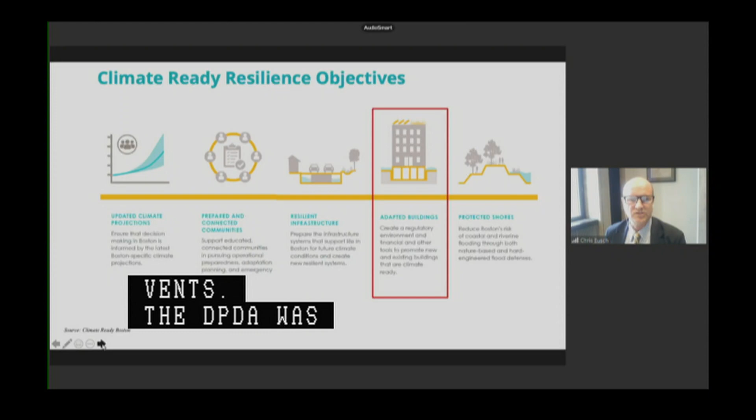To address this risk, Climate Ready directed the BPDA to develop design guidelines as well as a zoning overlay district to promote coastal flood resilience for development projects in vulnerable areas of the city.

In 2019, the BPDA developed a coastal flood resilience design guideline document for new construction and building retrofits, as well as recommendations for a flood resilience zoning overlay district. The design guidelines assist property owners in understanding their vulnerability to current and future flood events and provide a best practices toolkit for flood resistant design measures for a number of building types.

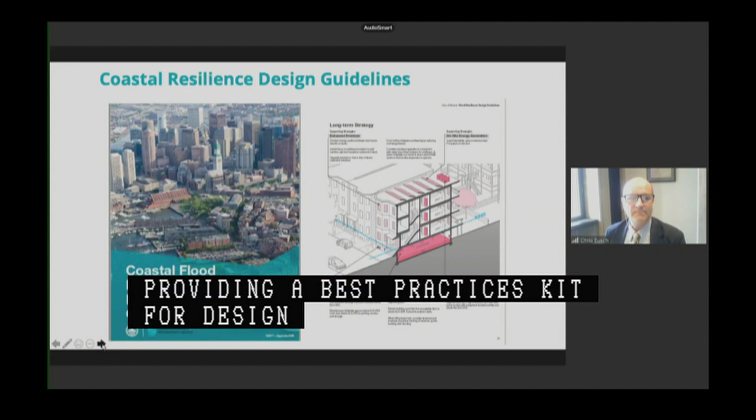After the adoption of the design guidelines by the BPDA board in September of 2019, BPDA staff have been working with a legal consultant to develop the zoning recommendations into the coastal flood resilience zoning overlay. I'll cover some of the primary provisions of the article at this time.

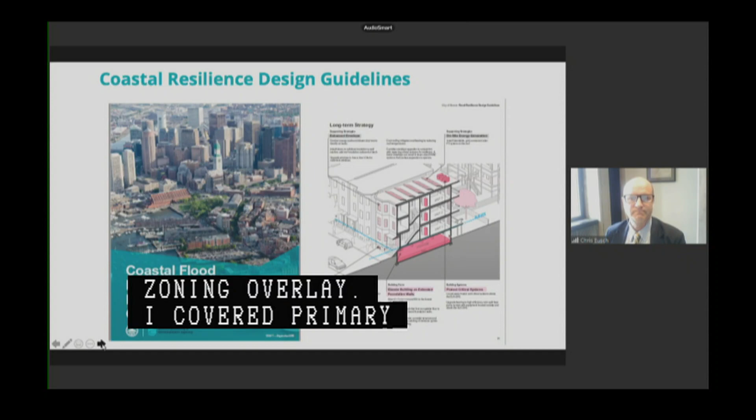First are the purpose and objectives. These are also referenced within the guidelines. Those are promoting resilient planning and design and providing consistent standards for the review of projects.

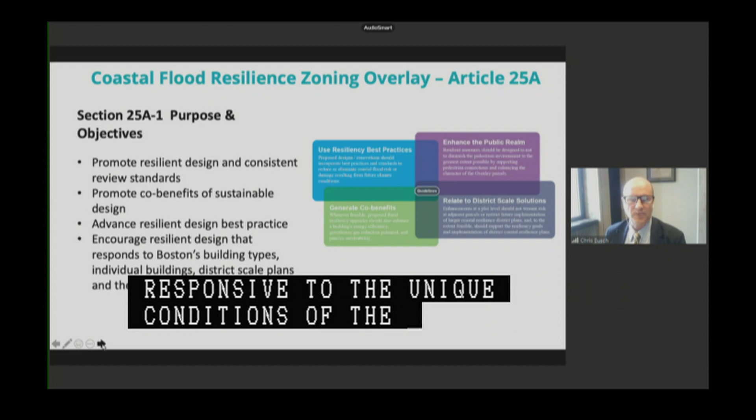Promoting co-benefits of sustainable design that address multiple climate impacts such as urban heat island as well as increased precipitation. Advancing adaptation strategies that are future looking and draw on the best current practice for long-term resilience, and encouraging design that's responsive to the unique conditions of the Boston building typology, also responding to district scale plans that look to protect broader reaches of vulnerable neighborhoods and also enhance the public realm.

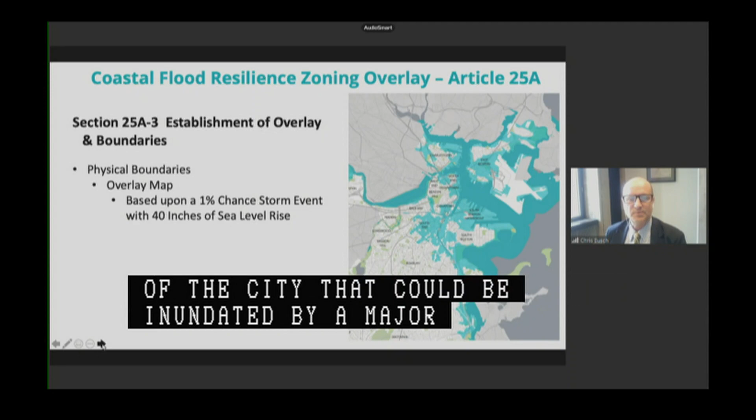So the overlay will apply to areas of the city that could be inundated during a major storm event known as a 1% chance flood with 40 inches of sea level rise. Based upon climate modeling, we expect that 40 inches of sea level rise around 2070, which is within the usable lifespan of most buildings that are currently undergoing BPDA review. That 40-inch inundation area is also already integrated into our BPDA zoning viewer, representing these flood extents and flood elevations.

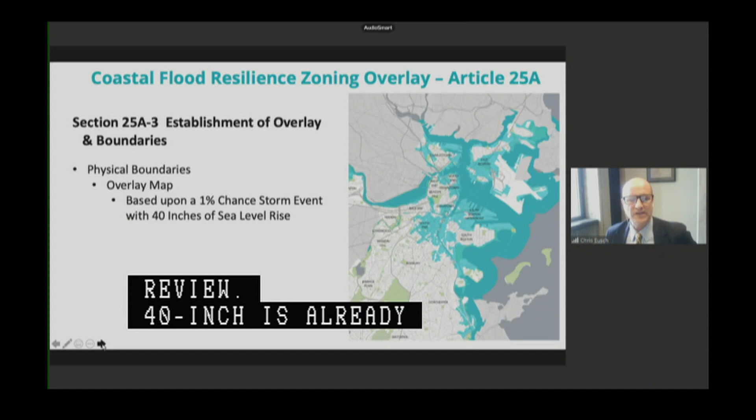This overlay also represents areas of flooding beyond the existing FEMA flood maps. Those FEMA flood maps are based upon historic storm conditions, not future conditions like the overlay.

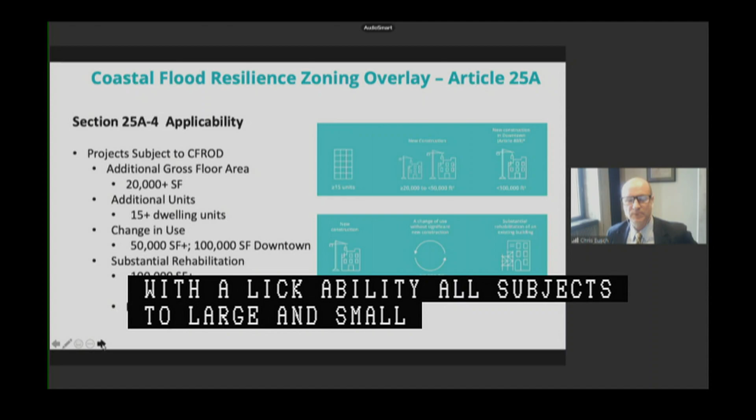With regard to applicability, all projects subject to large and small project review under Article 80 will undergo resilience review as a new component of review. Project proponents will have to address how their projects respond to the Coastal Flood Resilience Design Guidelines. And this process will be overseen and administered by BPDA staff.

We've hired a new senior architect for this very purpose.

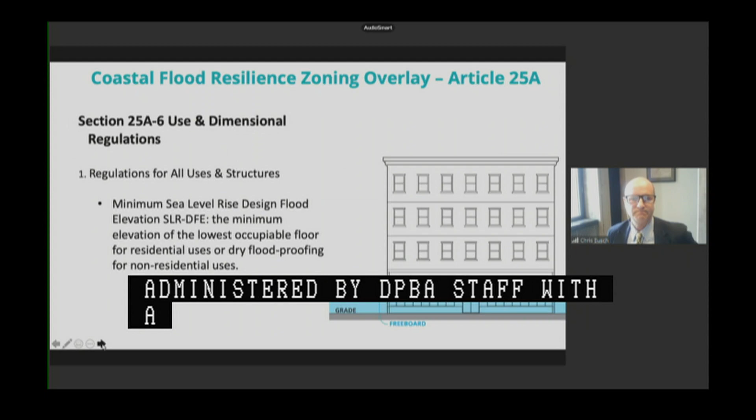There are also, within the overlay, dimensional and use standards to facilitate the application of these design guidelines.

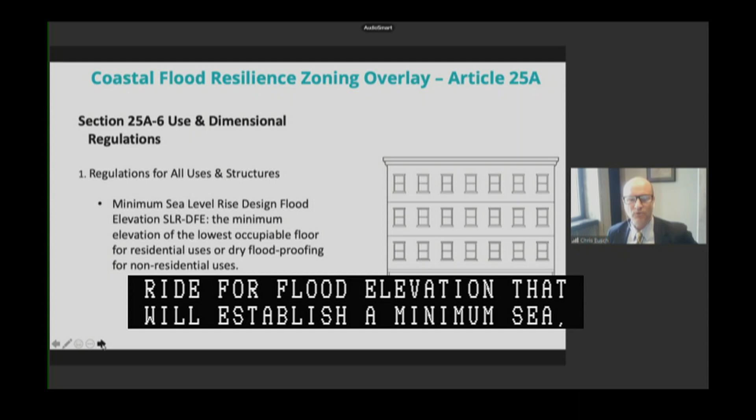Just to get into some of the specific provisions, there'll be a sea level rise design flood elevation, which will establish a minimum elevation for the lowest floor for residential uses and floodproofing elevation for non-residential uses.

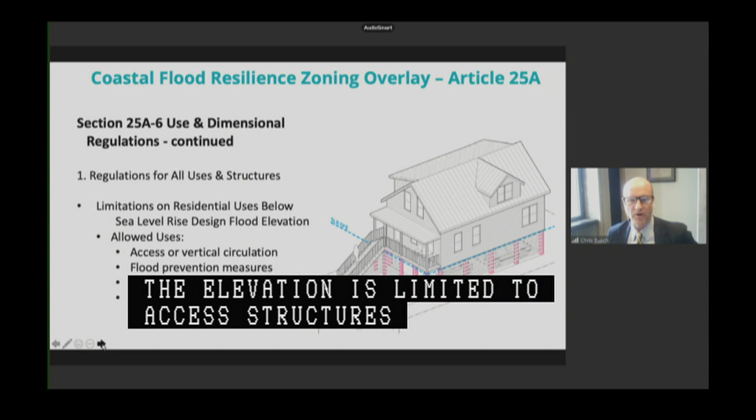There are also limitations on use below that flood elevation. For health safety purposes, uses beneath the elevation are limited to access structures such as stairs, flood prevention measures, storage, and parking, and these provisions are consistent with FEMA flood prevention standards.

To promote the elevation of occupiable space, projects undergoing resilience review will have their height measured from 2 feet above the flood elevation rather than at grade, which is what current zoning requires.

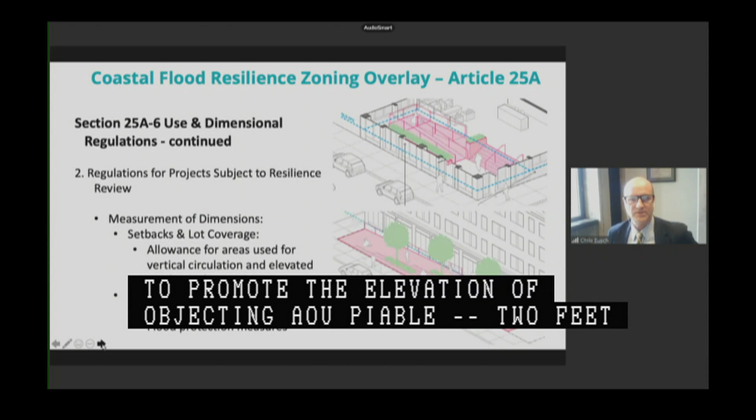And projects will have allowances to extend into side yards, rear yards, front yard setbacks for structures needed for vertical circulation, such as stairs and ramps that may be necessary to get from a lower surrounding grade to a higher first floor elevation. There are also allowances for side and rear yard encroachments for new structures to house mechanical systems to ensure those systems and utilities are not located in basements or below that flood elevation.

And also to maintain usable gross floor area, there will be exclusions for structures needed for vertical circulation and areas devoted to flood protection measures.

There will also be updates to Article 80 to integrate resilience review into large and small projects. Updates as well to Article 31A, the special purpose overlay district provisions of our zoning code, to establish resilience overlay districts.

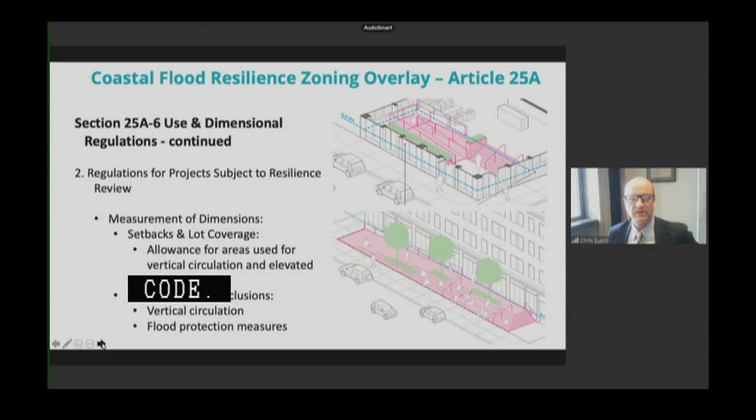With respect to public process, this really began back with the development of the design guidelines and the zoning recommendations in 2019. As part of that process, we held focus groups with practitioners in the legal, design, and development communities. We also held open houses in each of the affected waterfront neighborhoods for residents and stakeholders.

With respect to the development of the draft Article 25A language, we had that posted for public question and comment from mid-December 2020 until February 12th, 2021. We also held two virtual public meetings, which were very well attended with over 160 attendees. We received about 12 comment letters and emails, and based upon that feedback, we posted an updated version of the draft on August 24th of this year.

So with that, the recommendation is to have the director be authorized to petition the Zoning Commission to adopt the coastal flood zoning overlay and related updates. Happy to respond to any questions you may have.

Okay, thank you. Questions or comments from the board? Clearly, this is work that needs to be done. The question is inevitably going to arise as to whether we have guidelines as to what any of this might cost individual building owners or people who may be impacted by these changes. Do we have, or are we in the process of developing any guidelines of that type?

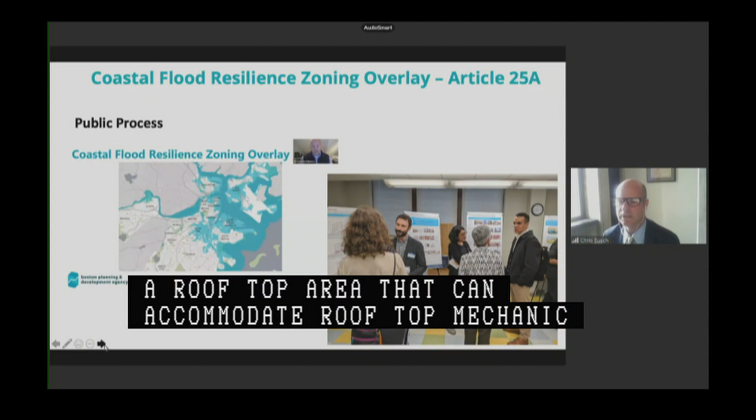Yeah, that's typically for cooling towers, et cetera, but all your electrical — transformers and switch gear — typically isn't on the roof. I've seen it anywhere from the 13th floor to other places. I'm just curious, if it's going to take up a whole floor that would be rented, is that additional space going to be allowed, or is it being discussed?

Yeah, I think that's something we would need to discuss — how height might be evaluated if mechanicals were significant enough to take up a whole floor and there was no other alternative for locating those systems, as part of a larger footprint, let's say, as opposed to going up.

I know after Sandy, New York City allowed an additional two stories — if you relocated your mechanicals that were in the basement, you could put two more stories on top of the building if you wanted to. Thank you.

Great. Any additional questions or comments? All really great feedback.

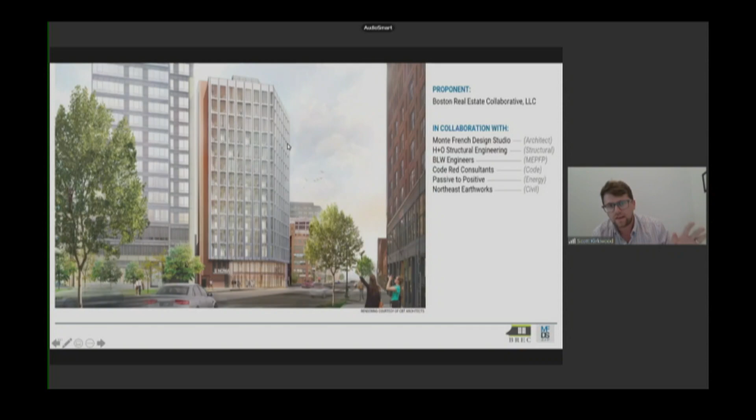For us, it's really about sustainability at the forefront. We're actually doing a cross-laminated timber project near our offices in Roxbury right now. In a building like a hotel, or any new construction for that matter in a really dense area like the West End, the heat island effect created by people—especially in a hotel scenario where they're running their air or heat as much as they want—is something we're really looking at ways to combat. So we're pursuing passive building practices to ensure that in an environment where people are using this stuff as much as possible, we're limiting the impact to the surrounding neighborhood as much as humanly possible.

More on that, steel is, for lack of a better phrase, kind of a thermal superhighway. So when you're trying to build a building that's as efficient as possible, steel creates thermal bridging that actually allows the outside air to penetrate the exterior walls of the building and into the core, and it ends up requiring a substantial amount of increased energy to meet the needs of the folks living in the building.

And for us, cross-laminated timber in itself is just a great way to take carbon that continues to get recirculated in the atmosphere and actually take that out of circulation. The trees that go into the cross-laminated timber used in the superstructure are actually at the end of their useful life in terms of their ability to absorb carbon from the atmosphere. So we're taking that out of circulation, which in turn equates to taking a substantial amount of automobiles off the road for a substantial period of time.

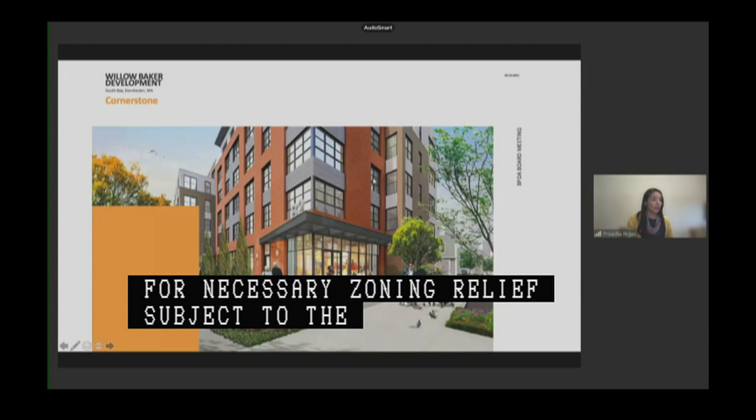We are pleased to provide an overview of the proposed Willow Baker development project located in Dorchester. As stated, the project is a mixed-use development located on a 1.3-acre site consisting of 3 new buildings with a total of approximately 177,300 square feet and 191 residential units. The residential units include 99 homeownership condo units and 92 rental units, and there are a total of 57 parking spaces on site as well as new open space.

I will offer a few remarks about the regulatory review and then turn the presentation over to the development team to review the project program, and then we'll assist with any questions you might have. Willow Baker LLC submitted a project notification form on August 7th, 2020. An IAG meeting was then held on October 6th, followed by a public meeting on October 22nd.

A request for supplemental information was then issued on April 12th, 2021, and a supplemental filing was then submitted on June 2nd. An IAG meeting was held in relation to that filing on June 23rd, followed by a public meeting on June 30th, with the comment period closing on July 6th of 2021. The project has gone through Boston Civic Design Commission review and was approved by the BCDC on September 7th, 2021. And I will now turn it over to Joe Hanley, the attorney for the development team, to advance the presentation.

Thank you, Sarah. Good evening, Madam Chair, members of the board, Secretary Polhemus, Director Golden. Attorney Joe Hanley, McDermott, Quilty, Miller. I am here representing Cornerstone Real Estate, Adam Sarba, who's the proponent. Also with us is Nidhi John from Prellwitz Chilinski Associates, who will take you through the presentation.

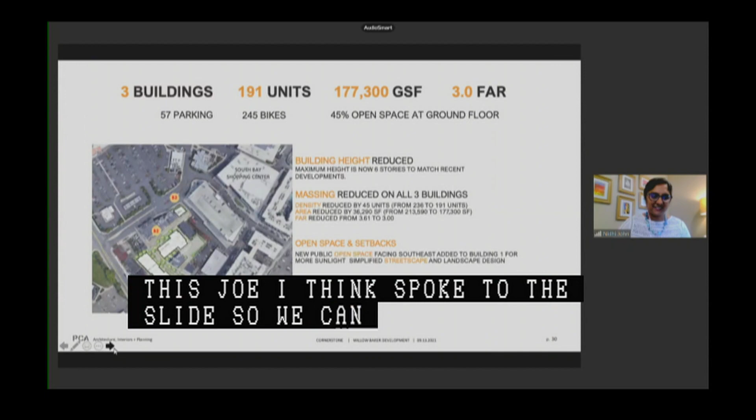This is an overview of the last few months of the process with the BPDA, as well as the BCDC Commission. As a result, the following slides will show you what it looks like, but it's 3 different buildings. As you can see, buildings are B1, B2, and B3. This is in the South Bay Shopping Center area, which was recently developed by the Edens property buildings. The 4 highlights for this project were, 1, the building heights were reduced to match with the recent developments in the area. Massing reduced from all 3 buildings.

The team was able to add more open space, 2 open spaces, actually 2 parklets, 1 in front of building 2 and 1 in front of building 1. And lastly, we had a big programmatic change, which basically converted the building that says B1. It's a fully condominium building with 99 units of home ownership. Next, please.

These are just a few existing photos of what the site looks like today. The 3 red markings are the actual 3 parcels, basically 13 original parcels that were assembled. And as you can see from the photos, you can tell the overhead telephone poles. There's about 11 telephone poles that we are making underground for this whole project. The highlight for this project is basically the public realm.

The sidewalks today are between 3 feet and 2 feet, and we are making them 10-foot sidewalks. Adding landscaping, we are giving a good chunk of our property off to make the roads wider and to allow for the sidewalks to be wider, because our sites are in a good position to be able to help the larger community. Next, please.

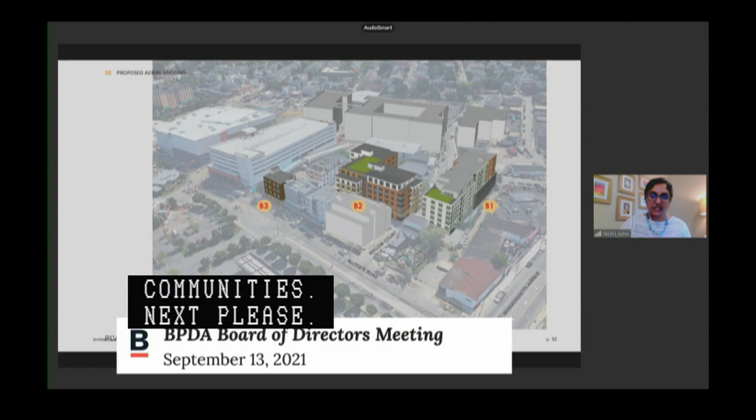This is an overall massing model to just give a sense of what the buildings are and how they're spatially placed against everything. Next. And as you can tell, buildings B1 and B2 are the 6-story buildings, and building 3, which is a little one, is the 4 stories, which kind of ends the street.

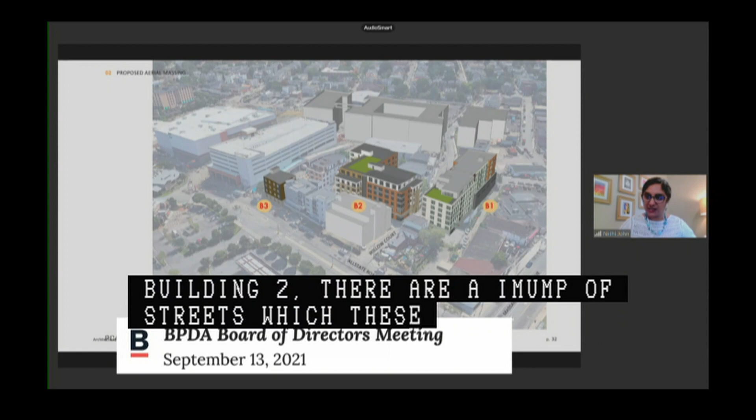So there's a bunch of streets that these buildings affect, about 4 or 5 streets. Willow Court and Baker Court, which you can't see because it's between the words building 2 and the actual building. But we can run through the plans, we'll show you. So on the left that you see is building B1, which is a condominium building. The one in the middle, B2, is rental. And the last building on the right, which is B3, is also rental. So that adds up to the 191 units.

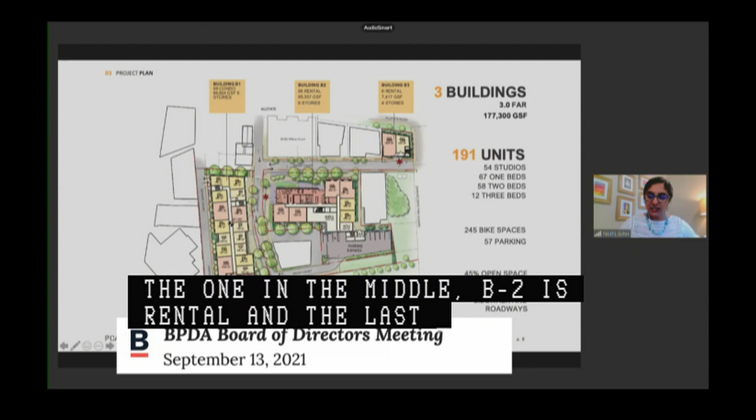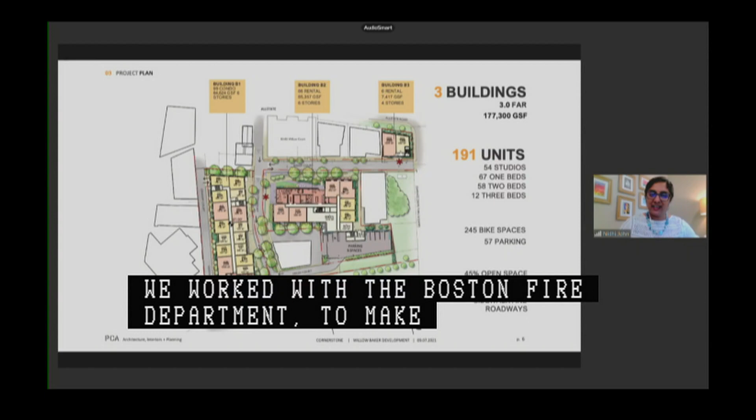You'll see we focused on making sure we had enough 2 bedrooms and 3 bedrooms, along with studios and 1 beds for this area. We worked with the accessibility department at the BPDA, as well as the BPDA folks internally, to understand the limitations and to make sure that we had good clearance with streets. We worked with the Boston Fire Department to make sure that we addressed everybody's concerns in terms of accessibility onto the site. Today, where you see the words building B3, the street ends there and there's no neighborhood connectivity to the larger neighborhood.

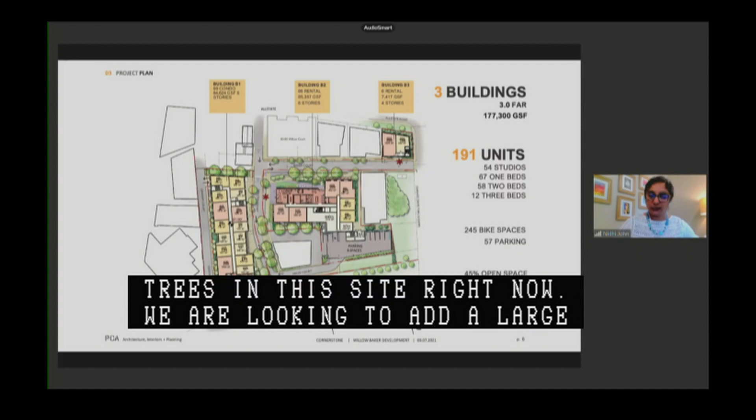So the goal of this project is to add trees, and you would have noticed from the pictures, there are no trees in this site right now. We are looking to add a lot of streetscape, landscape, and better public realm across the board on 3 streets. Next, please.

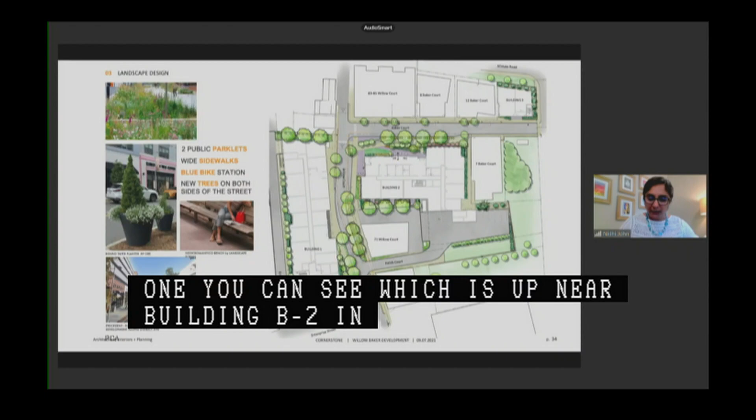This is a landscaping plan that just gives a sense of, when I talked about public space and open space, we looked at adding 2 public parklets. One you can see near building B2, in that area which says Baker Court at the top. And then at the bottom where you see Enterprise Street, which is building 1. So we looked at creating more public spaces for the neighborhood where people can come and hang out and sit.

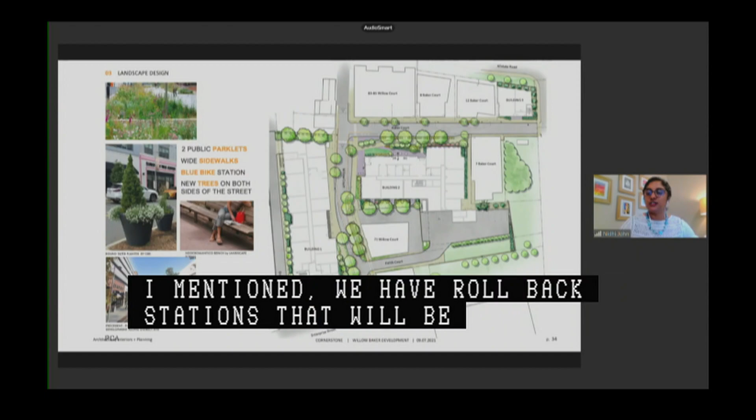We have widened the sidewalks, as I mentioned. We have a 15-dock Blue Bike station that will be beneficial for the neighborhood. And as I mentioned, new trees on both sides of the streets, all along Willow Court, the vertical one, as well as Baker Court, the horizontal one. Next, please.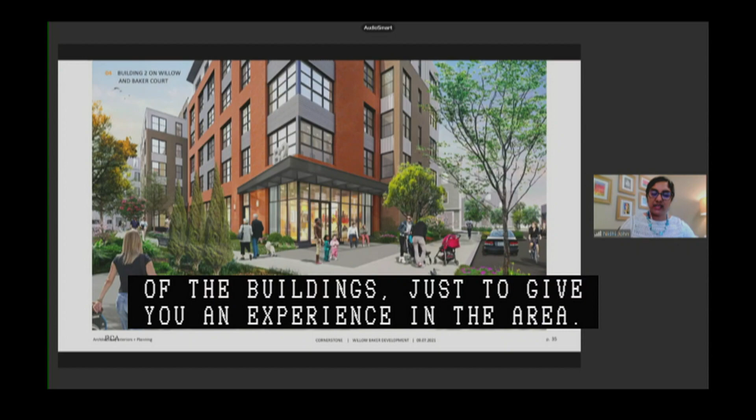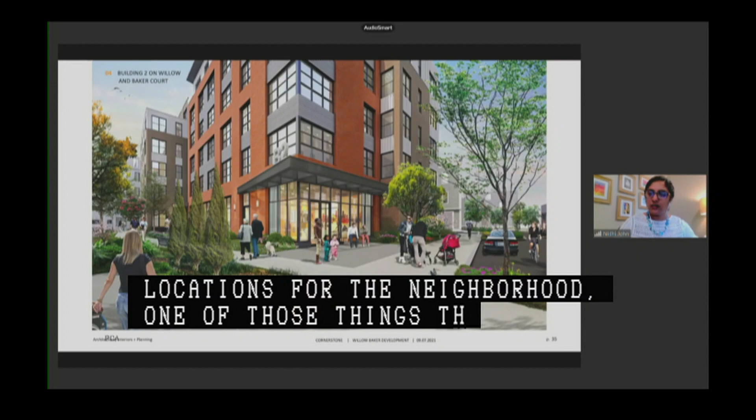And we have a drop-off and pickup area in this neighborhood. We met with the neighborhood many times in the last few years, and we talked about what the neighborhood needed as an amenity, and drop-off pickup locations for the neighborhood were one of those things that we maintained on the site. So that's why you kind of see the car next to the stroller. That's a place for the drop-off pickup. But this is building 2. The next slide, you'll get a sense for the other 2 buildings as well.

This is building 3, which is the tail end. It's the last parcel along Baker Court. It abuts a driveway, which is near the Edens parking garage. So you kind of see the parking garage in the distance, but the goal was to match the existing context in the neighborhood. So this is 4-story buildings on that side, so we made sure we matched it, and we're talking about how to liven up the street.

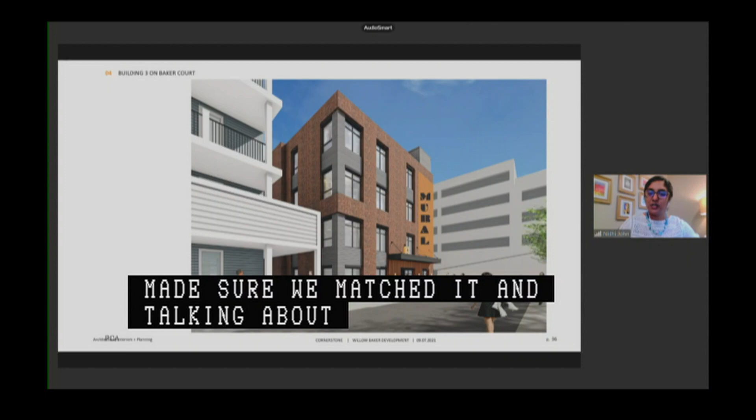The words mural are to indicate that we would have some kind of a mural, as that is the street that turns to the South Bay Shopping Center. So you want to make sure that activated the pedestrian life. Next, please.

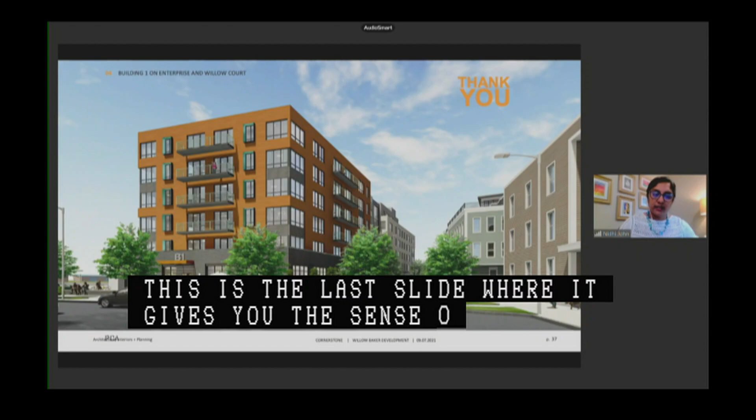This is the last slide, where it gives you a sense of the condominium building, which is building 1. To our left is Mass Ave. The street that you see in front of us is Enterprise Street. And like I was talking about the public realm space, we basically gave a good chunk of the property for building 1 on the left. So you can see the road looks really wide. It was intentionally that way so that we could add landscaping for the neighbors on the opposite end too.

So the road felt more balanced for the greater good of the neighborhood. That basically ends the presentation that we had. And the last slide was again the highlights of the project. Sorry if I breezed through quickly. I'm happy to go back to any questions.

Thank you. Thank you, Nidhi. Thank you, Madam Chair. That concludes our presentation. Yeah, thank you, everyone. Great job, Nidhi. It was a perfect amount of time, enough detail and enough broad strokes.

So, I just really like the addition of the green space, given that we definitely take a climate justice lens to the work that we're doing. It's something that is, again, top of mind when we're building in these already dense neighborhoods that don't have a lot of green space. So just lovely to see. Questions or comments from the board?

Just a comment, could you go back to your second slide, the aerial view of the overall neighborhood? And in some respects, this echoes the chair's comments. Page 5, Dr. Landsmark, I think. Yeah, there's one that's even a broader view than this. Yeah, that one.

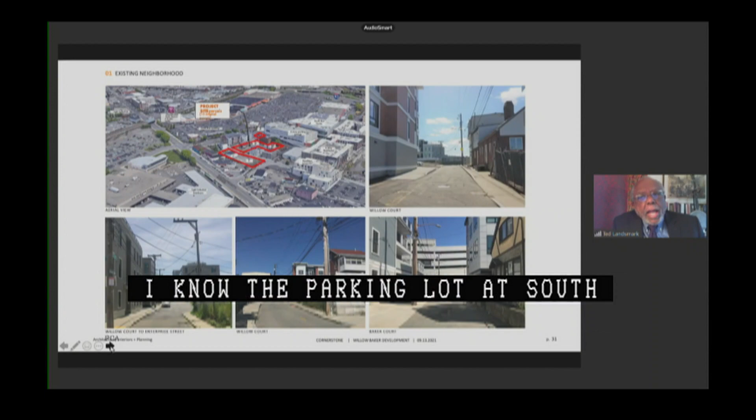This area for a long time has been really an environmental disaster in terms of environmental justice. As far as I know, the parking lot at South Bay does not have permeable paving. The area is surrounded by heavy traffic. The Amtrak line runs through it by the T there. And this is an area where there's going to be a lot more residential housing going in over the next

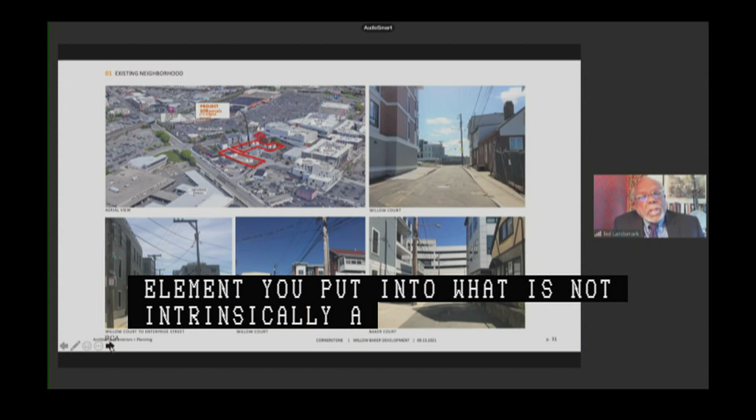few years. And my comment is to commend and thank the proponent and the design team here for taking a step towards making this area much more environmentally friendly. The plantings, the sidewalk widths, the overall design element that you've put into what is not intrinsically a very large area as such, I hope becomes much more of a precedent for other developers, particularly residential

developers in this area. And I want to thank the staff and all of the folks who are taking a step towards improving the environmental quality of this area. We've got a couple of areas like this in the city, but this one is, I think, particularly egregious, particularly because it brings so much pollution into a neighborhood, which is not that far from the waterfront, and certainly not that far from downtown, and is surrounded by communities that don't have a lot of wealth.

And I view this as an asset. So I'm hoping that there's a message that's sent by this development to other folks who intend to develop residential properties in this area, that we really want to see a level of environmental justice implemented here. Thank you, Dr. Landsmark and Madam Chair. That was beautifully said.

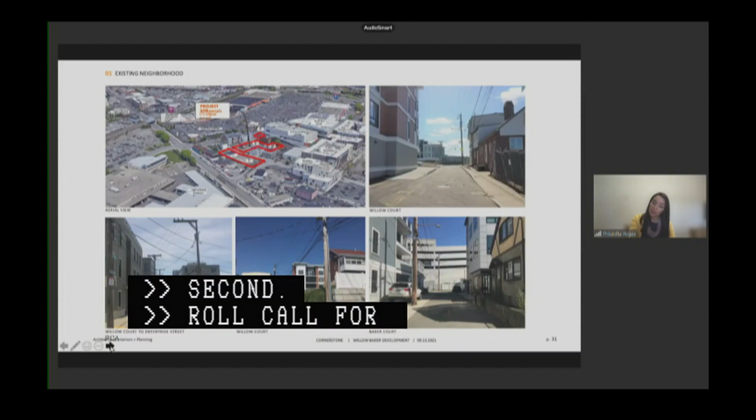All right, any additional questions or comments? Okay, hearing and seeing none, a motion is in order. So moved. Second. Roll call for a vote. Ms. Downs? Aye. Mr. Monahan? Aye. Landsmark? Aye. Mr. Miller? Aye. And the chair votes aye, motion passes. Congratulations, good luck. Thank you very much. Thank you. All right, take care.

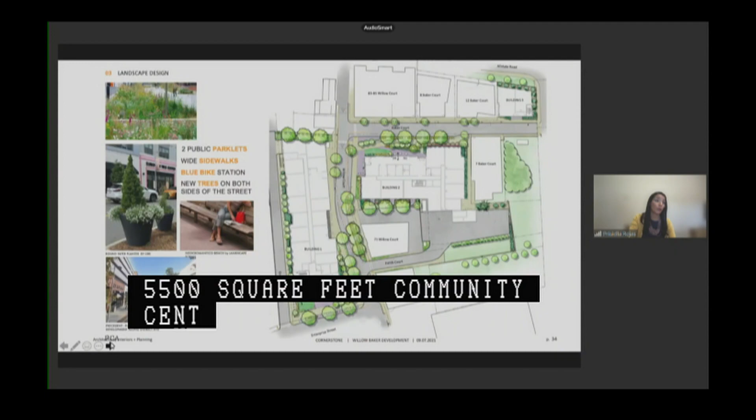Item number 18, request authorization to issue a scoping determination, waiving the requirement of further review pursuant to Article 80, Section 80B-5.3(d) of the zoning code for the Cheney Street Apartments project consisting of 59 affordable senior rental units, 15 affordable homeownership units, 5,500 square foot community center, and 34 parking spaces located at 4 through 18 Cheney Street, and to take all related actions. Lance.

Thank you, Madam Chair, members of the board, Director Golden, Madam Secretary. I just want to note for the board that this project is seeking funding from the Department of Neighborhood Development and also from DHCD. And the project was filed by the Jamaica Plain Neighborhood Development Corporation. The project is located at 4-18 Cheney Street, 24 Cheney Street, and 3-5 Schuyler Street in Roxbury, outside of Grove Hall.

The project consists of 75,000 gross square feet of development, including 74 units. 59 are designated senior rentals and 15 home ownership units, 9 of which will be located at 24 Cheney Street, all 3-bedroom flats. 6 more will be located at 3-5 Schuyler, all 2-bedroom flats. The senior building unit mix consists of 57 1-bedroom units and 2 2-bedroom units.

A Program of All-Inclusive Care for the Elderly (PACE) center measuring 5,500 square feet, including a total of 34 new parking spaces, 28 of which will be located at grade below the senior building, while 6 spaces will be located at 3-5 Schuyler. For the senior rental building, the IDP percentages will range from 30%, 50%, and 60% of AMI. Jonathan Garland, the project architect, will give a brief overview of the proposed project, and the project representatives are available to answer any questions from the board. Jonathan, I think you're muted.

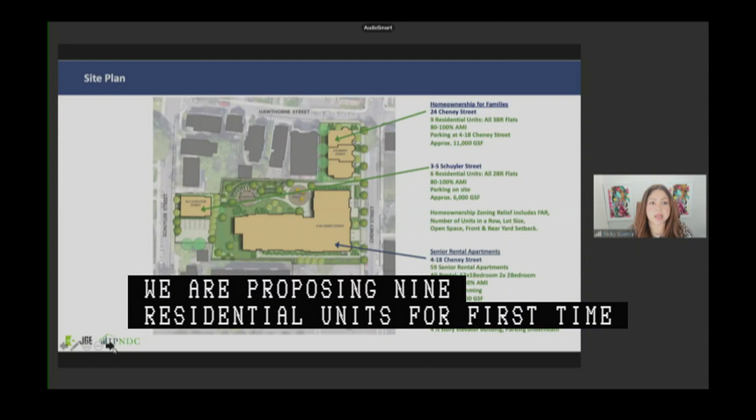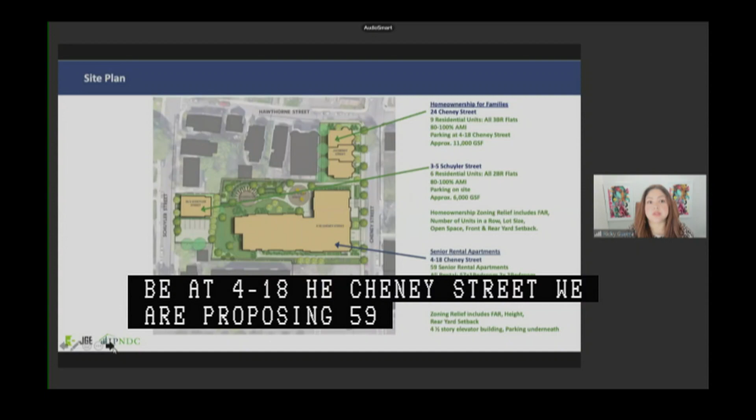At 24 Cheney Street, we are proposing 9 residential units for first-time homeownership for families at 80 to 100% AMI. At 3-5 Schuyler Street, we are proposing 6 residential units, all 2-bedroom flats, for families at 80 to 100% AMI. And at 4 to 18 Cheney Street, we are proposing 59 senior rental apartments, all at or below 60% AMI, with 31% of those serving family or seniors at or below 30% AMI.

Thank you, Ricky. This slide shows a closer zoom-in of the 59-unit senior building. Looking at the image on the right, you can see the lobby space as well as the units, shown in orange, and the PACE center, shown in pink.

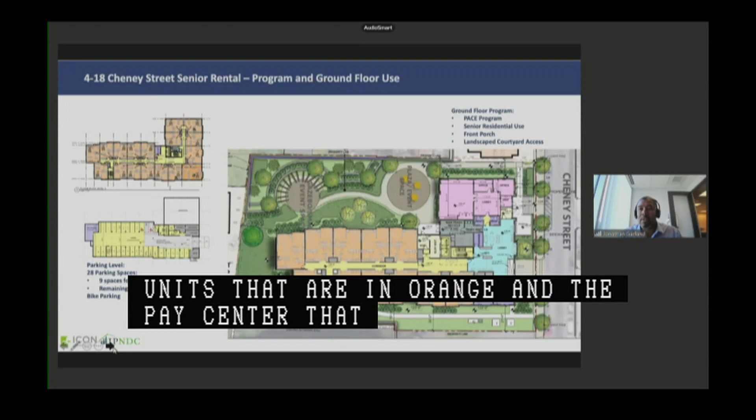We really wanted to take care with Cheney Street, which is currently a one-way street going down the page and will remain a one-way street. We wanted to enhance the public realm by widening sidewalks, creating new street tree plantings, and pushing the building further back away from the street to allow for ample circulation, setback space, and entry/exit from the parking, which is below grade because the site slopes up at an angle.

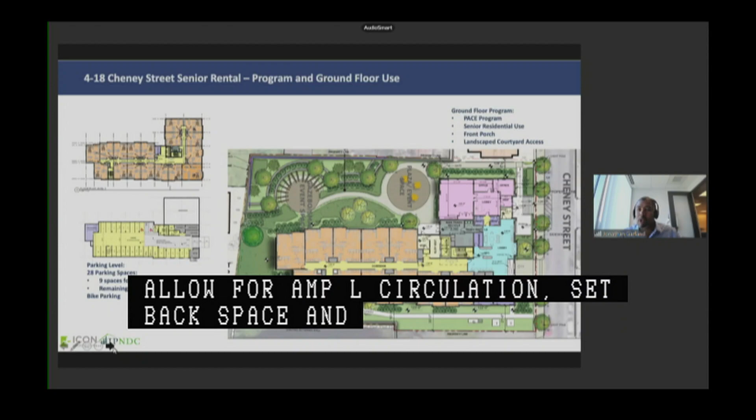We've also been able to incorporate a plaza event space, really an ample backyard for the senior community, which will have great southern sunlight and the ability for privacy and security for the seniors.

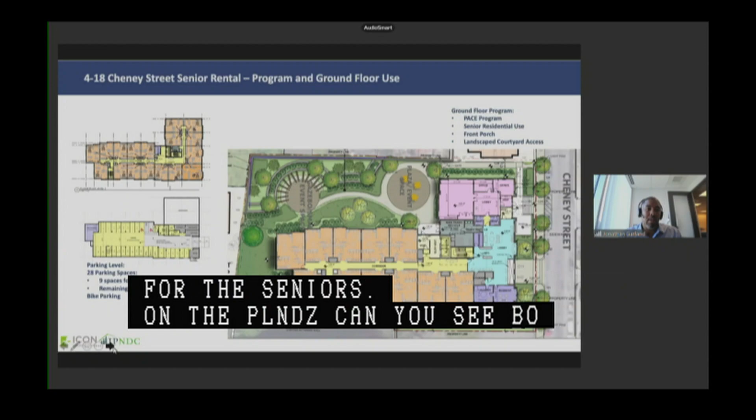On the left you can see both the parking plan, in yellow, and the residential plan above. I'll note that the home ownership units all have one-to-one parking. The 9-unit Cheney Street building uses the senior building for parking, and the Schuyler Street building has parking on its own site.

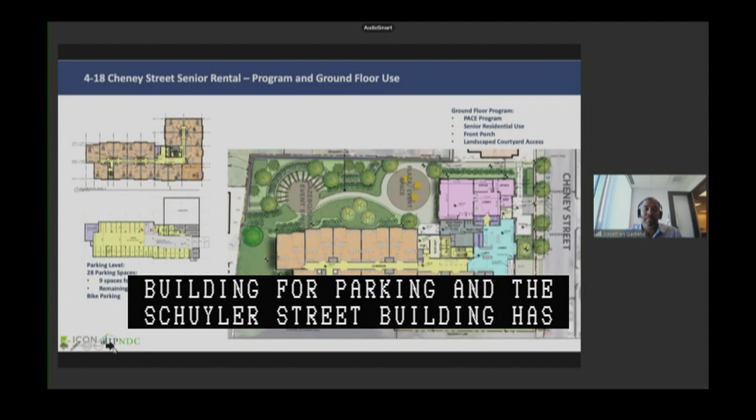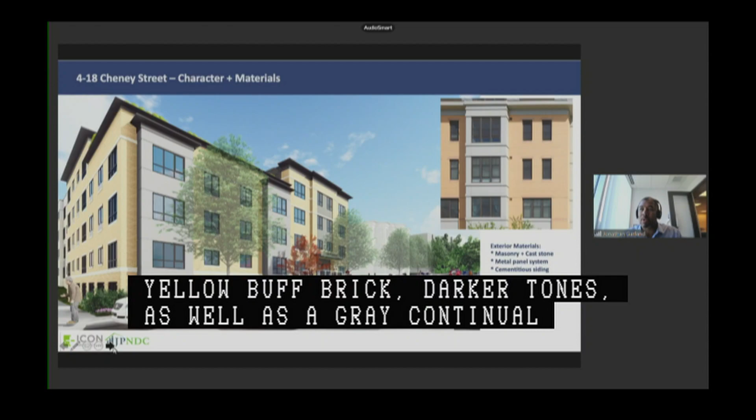This shows a perspective rendering from Cheney Street looking at the 59-unit senior building. A lot of the precedent we took from the area was the use of the yellow buff brick, darker metal tones around the cornice lines, and a gray contrasting metal where you see the bay windows. That, combined with the trees and larger sidewalk space, we think creates a nice contribution to this currently underutilized site.

This shows another angle of that same front view, looking down toward Blue Hill Avenue. We're really working to negotiate the grading change, as the site slopes up from Blue Hill Ave toward Hartwell Street, which is at the top end of Cheney Street.

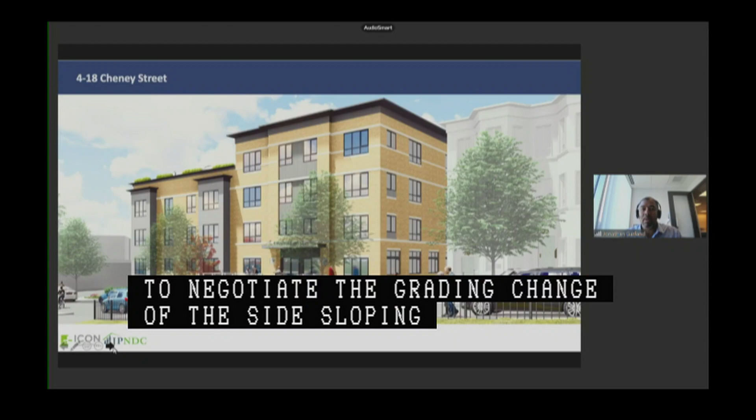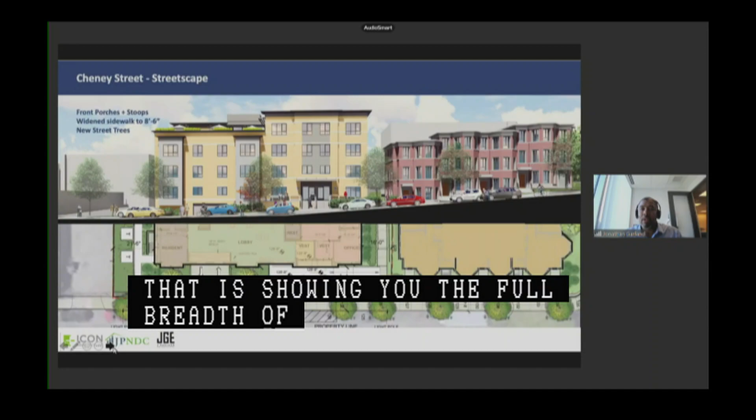This shows the two buildings paired next to each other: 4 to 18 Cheney on the left, and 24 Cheney on the right. This shows the full breadth of this neighborhood intervention, where the senior building is in yellow and the home ownership building for families is a fiber cement building with the look and feel of red brick. That was intentional so it could pick up on the character of the street, with bow fronts and an angular form, and each unit having its own direct entry off of Cheney Street.

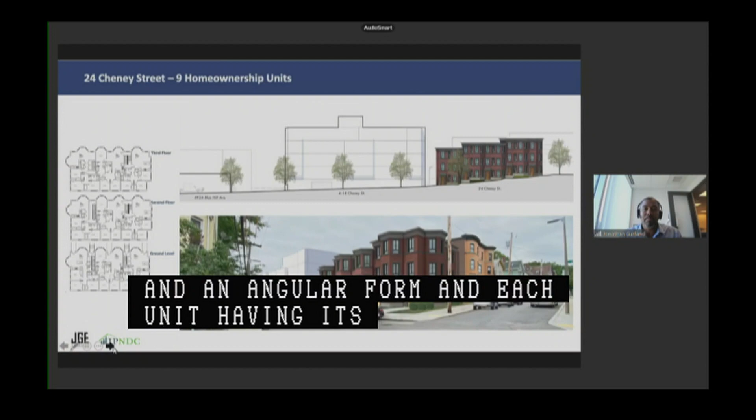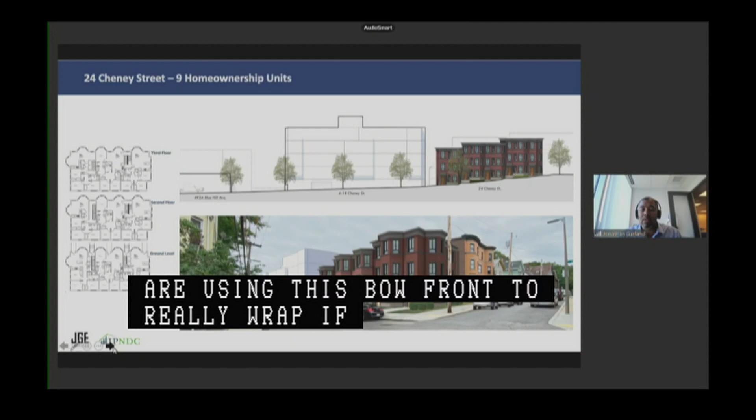So this is showing more of a zoom in of the 9-unit homeownership building. It does wrap the corner of Cheney and Hartwell Street. So we're using this bow front articulation to really wrap the corner. We're continuing the newly widened sidewalk with street trees along that edge. And as Lance mentioned earlier, this building is a collection of 9 3-bedroom flats, 3 units per floor. Next slide.

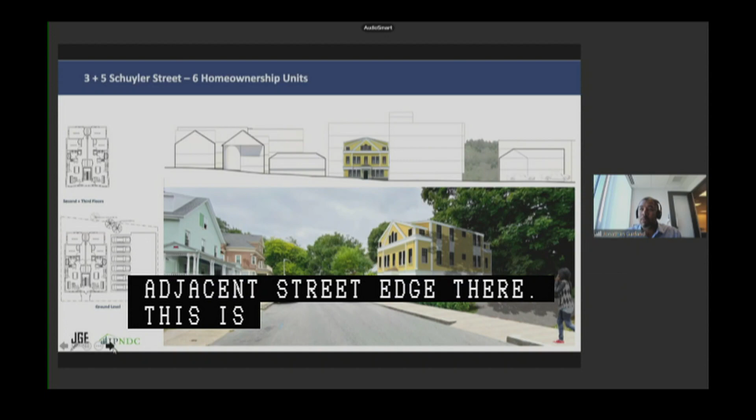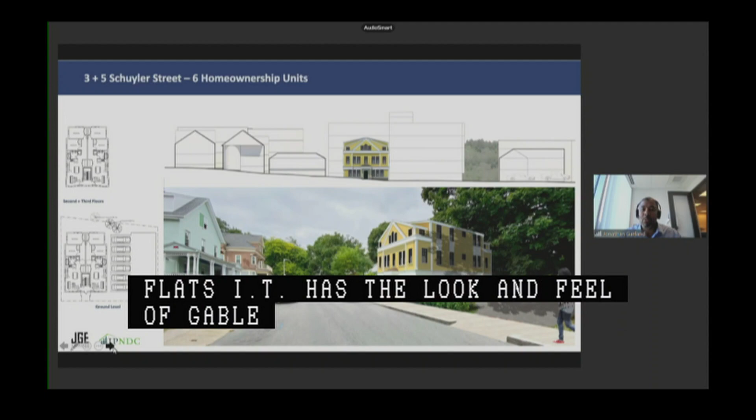And this is skipping over to 3 to 5 Schuyler Street, which is on the opposite adjacent street edge there. And this really is taking cues from a lot of the larger Roxbury single-family homes that you are probably familiar with, the 6 to 8 bedroom homes. That was the genesis, or the look and feel of the building, although it does house 6 independently owned 2-bedroom flats. It has the look and feel with gable ends and a lot of evolution of the design happening on the front facade to animate it and make it look sculpturally interesting, like a lot of the other single-family homes on Schuyler Street.

You can also see how we've tucked in the parking, the 6 spaces there, and have created a decent landscape edge buffer along the street. Next slide.

Awesome. Thank you. Great presentation, Ricky and Jonathan. So, questions or comments from the board?

I have one. First of all, I find the substance of the project that you're putting forward very appropriate for the time and the neighborhoods and the housing needs of the people of Boston at this moment. But I want to add a small comment. If you would go back to any one of the renderings that you put up, one of the early ones.

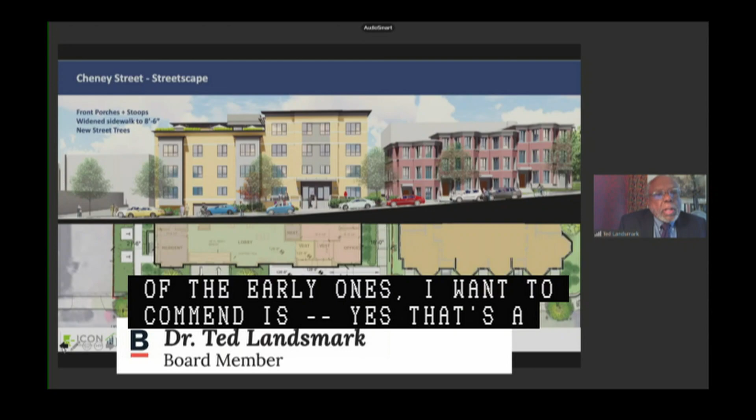I want to commend — yeah, that's a good one. I want to commend the development team for putting into this image people who are clearly seniors, they're clearly diverse, they're using different modes of transportation. Not every car that's rendered is a BMW or Mercedes.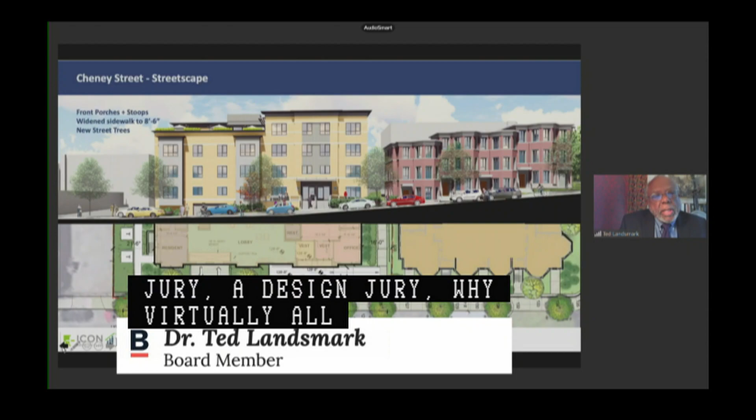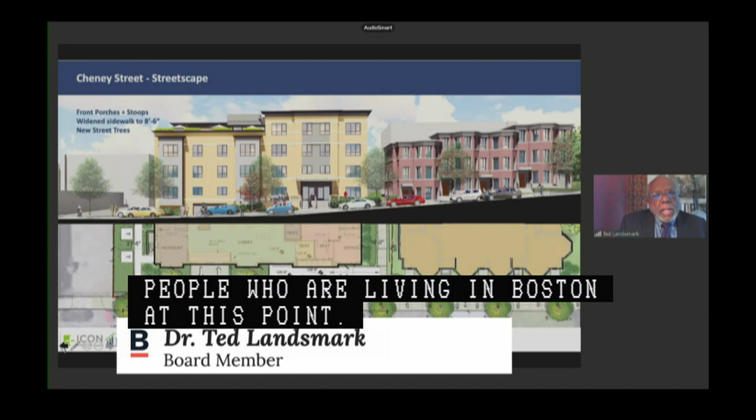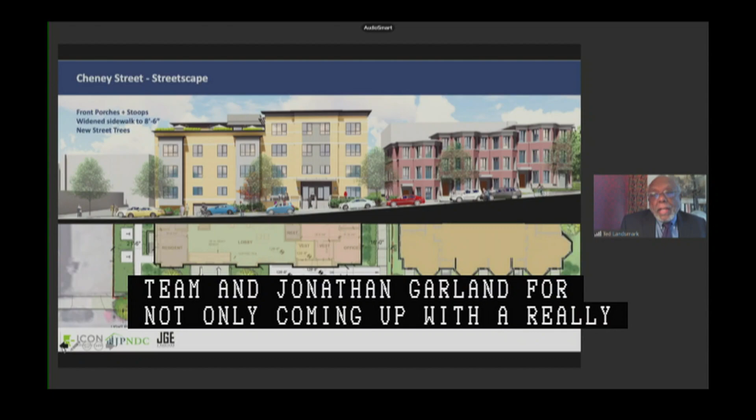I just finished sitting on a jury, a design jury, where virtually all of the renderings showed people in Boston communities who looked like architecture school students, traditionally defined. And I, for one, would like to see more of these presentations like this one that show the real people who are living in Boston at this point, and not some version that came out of a designer's toolbox. So I commend the Jamaica Plain team and Jonathan Garland for not only coming up with a really nice design that clearly fits into the neighborhood.

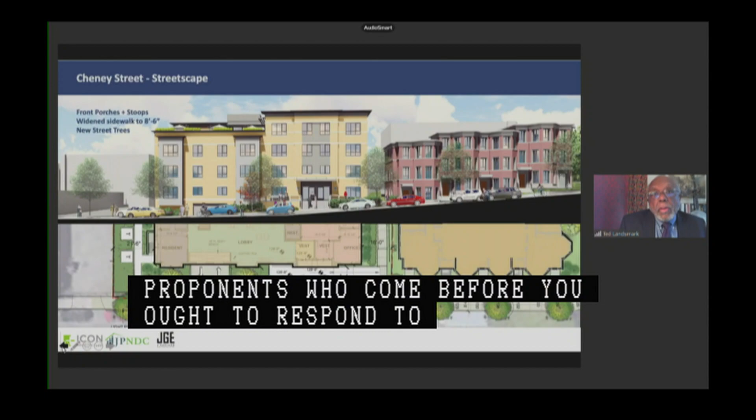But also one that shows what Boston is and has become and will be into the future. And I think many more of the proponents who come before us ought to respond to the obligation of designing for the city that we have become, and not the city we might have been once.

Thank you, Dr. Landsmark, for that comment. And I would just make mention that this project has been a collaborative joint venture between J. Garland Enterprises and Icon Architecture, who have been doing a really nice job on the senior building and are responsible for this image. But thank you for that comment.

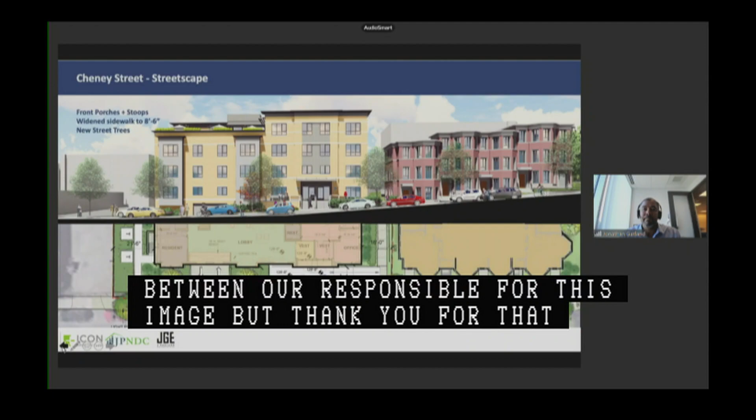Great, yeah, plus one. It's funny, in my notes I was like, it feels and looks like it fits, like it felt like Boston. I couldn't quite figure out what it was, just the design architecture, but maybe picking up on what Dr. Landsmark was saying, of just kind of seeing yourself represented and seeing the variety even in the imagery.

Yeah, good points. And again, great job. And I really do like the design. Sometimes we're picking up on the architecture of the street, right? And I'm like, well, does it? I don't really know. But this one really does feel like I can see and feel those elements in those renderings, and can envision enlivening the neighborhood with the new, while respecting the history and the context, which is, I think, in our mission statement or tagline somewhere. So it's a great presentation.

Additional questions or comments from the board? I'd just like to add, great job. I love the green space, and it truly does seem to fit into the neighborhood. So well done. If you added a couple of double parked cars, it might look more. So, but excellent, good work. Thank you. Thank you. Good stuff.

All right, I think a motion is in order here. So moved. Second. Roll call for a vote. Ms. Downs? Aye. Mr. Monahan? Aye. Dr. Landsmark? Aye. Mr. Miller? Aye. And the chair votes aye. Motion passes. Congratulations and good luck. Thank you. Thank you. Thank you.

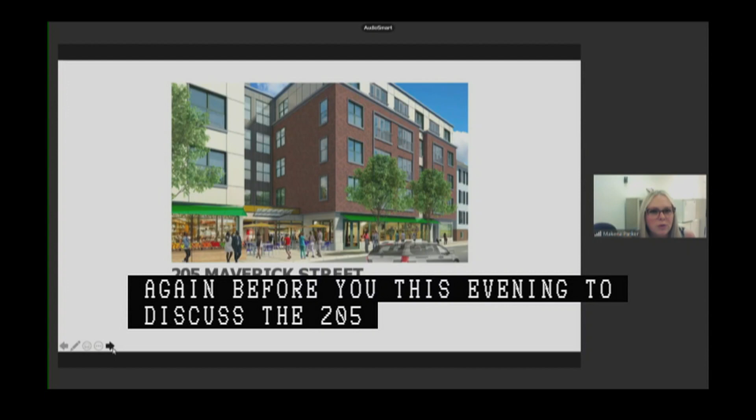We are once again before you this evening to discuss the 205 Maverick Street project. As you may recall, this project was originally approved by the board in November of 2018. At this time, the project included approximately 60,000 square feet, comprised of 49 rental units. Tonight, we ask you to consider this project update, which was filed with the BPDA on June 22nd, 2021. This project update proposes a change in programming from rental units to condominiums. 205 Maverick Street remains at its previously approved size. The parking and retail components also remain unchanged from the 2018 approvals. Outside of the modified IDP obligation, which now includes 7 IDP units, all mitigation and community benefits associated with the project remain the same.

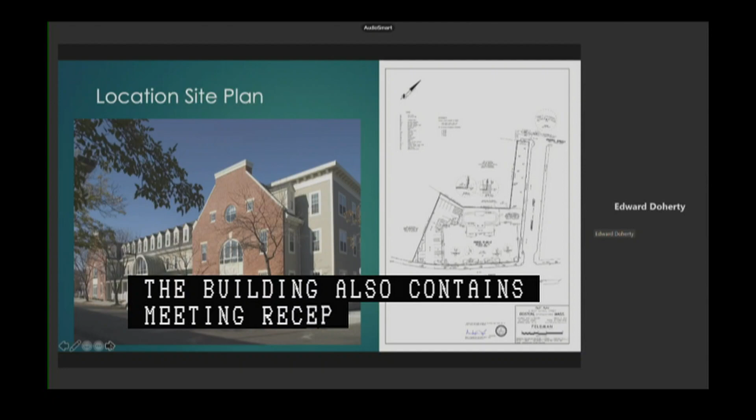The Selma Lacy House is a 3-story brick building containing 66 assisted living dwelling units, of which 33 are income restricted. The building also contains related meeting, reception, recreation, dining, and medical management space, a senior daycare center, outdoor parking spaces, and landscaped open space. Selma Lacy opened in 2004 pursuant to a land disposition agreement between the current owner, Mishawum Assisted Living Associates, LLC, and the BPDA, successor of Boston Redevelopment Authority.

Next slide, please. The location: Selma Lacy House is accessible to Interstate 93 and Route 1, City Square, and is well served by the MBTA's Boston Community College Rapid Transit Station and MBTA Bus Route 92.

Since the current owner opened Selma Lacy House in 2004, the property has only been at full occupancy once in its 17-year history. Moreover, the building has been operating at a $1 million deficit for each of the past 4 years. This amounts to approximately $4 million in losses due to the high vacancy rates and the high expenses of operating the Selma Lacy House.

The developer is proposing a complete interior renovation of the entire building at a cost of approximately $11 million, and to change the building program from the assisted living model to a modern model of 48 100% income restricted dwelling units for seniors, with service to be provided by third-party providers for residents.

With respect to concern about the potential relocation of existing tenants, the applicant has been actively engaged in communications with residents and their families about the proposed transition of services from a fully licensed assisted living facility to a senior independent living model with coordinated third-party services.

We are committed to not displacing anyone. Our intention is to provide third-party coordination through PD Resident Services, PACE, and Boston Senior Home Care. We have partnered with Boston Senior Home Care to help us educate residents and families about the proposed post-renovation service model so they can confidently decide if the service model will work for them.

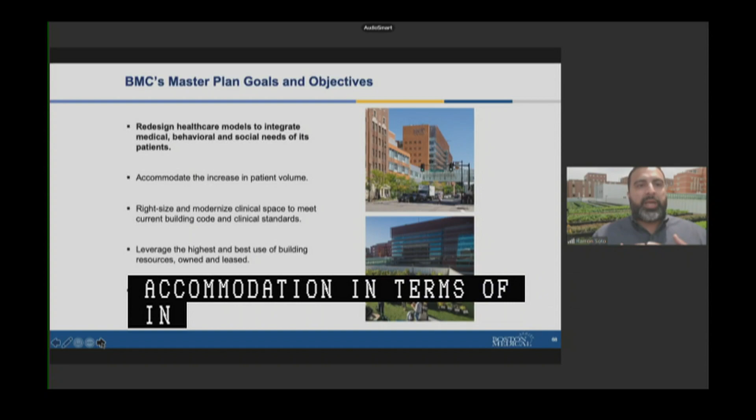Next slide. And that's what brings us here today. I wanted to talk very quickly about the purpose and goals of the plan that we bring before you today, which really specifically revolves around the redesign of healthcare models in order to integrate medical, behavioral, and social needs of our patients. And what that requires is some accommodations in terms of increasing patient volume, as well as right-sizing and modernizing the clinical spaces that are just not at where the clinical standards demand them to be.

We also want to leverage the highest and best use of our resources, both owned and leased, and incorporate the important lessons we've learned from the COVID-19 pandemic. Next slide.

So what have we learned? Number one, our inpatient units need more space. The surge of inpatients has highlighted the need to add beds. In terms of outpatient, we've also learned that the introduction of telehealth has actually tempered the need to expand outpatient space within our facilities.

Also, research has proven, with everything that's happened in the last two years with regard to the COVID vaccine, that the people we serve, who are highly underrepresented and underserved, are also underrepresented in research clinical trials. We've also learned a lot about housing through COVID and the important need to improve access to safe and affordable housing options, especially for those with complex medical needs.

Next slide. That led us to have a lot of conversations, including over a half dozen with the community, where we were able to explain the different components of the plan, as well as listen and incorporate that feedback, which included a change from our initial plan to removing the ramp parcel project, because we listened to the neighbors, we understood them on the disruption it would cause, and we shifted our plan as a result.

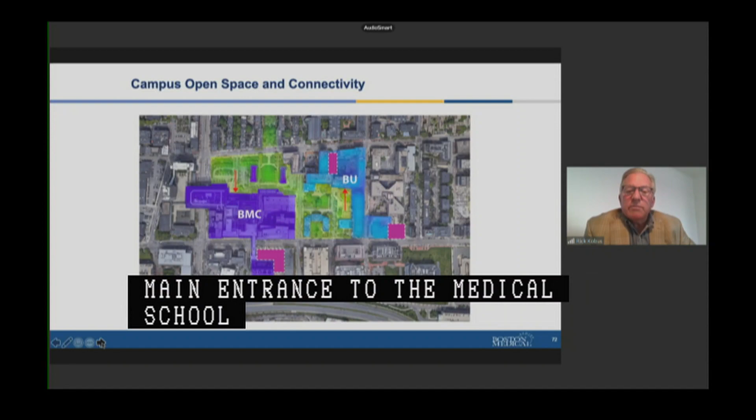Just to orient you to our campus a little bit, Boston Medical Center is shown in the purple tone. Boston University Medical School, Dental School, and School of Public Health are shown in the blue tone. The main entrance for Boston Medical Center is shown in the arrow to the left off of Harrison Street. Main entrance to the medical school is shown off the green space to the right at BU.

These connective green spaces are an important element of our campus. They actually connect to the South End community, and they also feature many of our historical buildings on the campus. They also create a significant identity and a place of respite for our neighbors as well as for our staff. That played a very important role during the pandemic. Next slide, please.

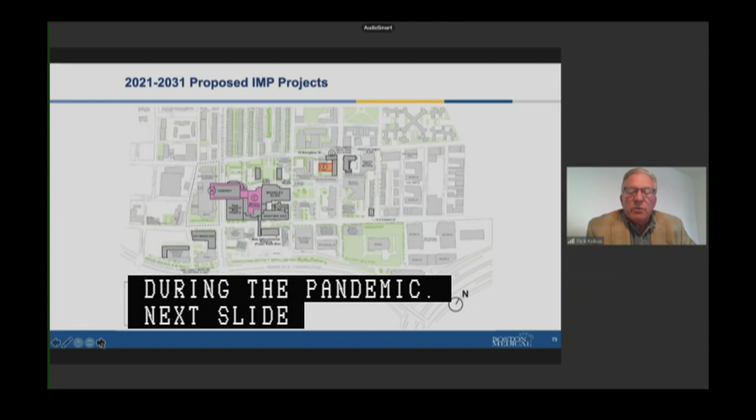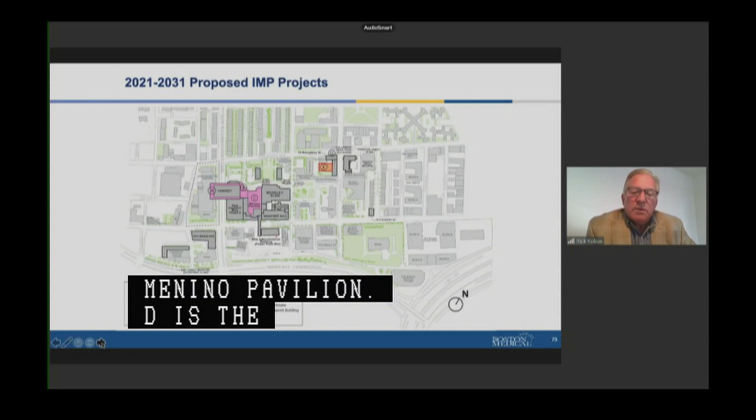Projects that we're requesting approval or addition to our existing institutional master plan are the expansion of the Yawkey 6th floor, Menino Yawkey lobby addition, shown as B. C is the 9th floor addition to the Menino pavilion. D is the mixed-use affordable and supportive housing at the Collimore Old Evans building. And E is our clinical research building, which we moved from a site on Albany Street at the request of our neighbors adjacent to the East Brookline neighborhood. Next slide.

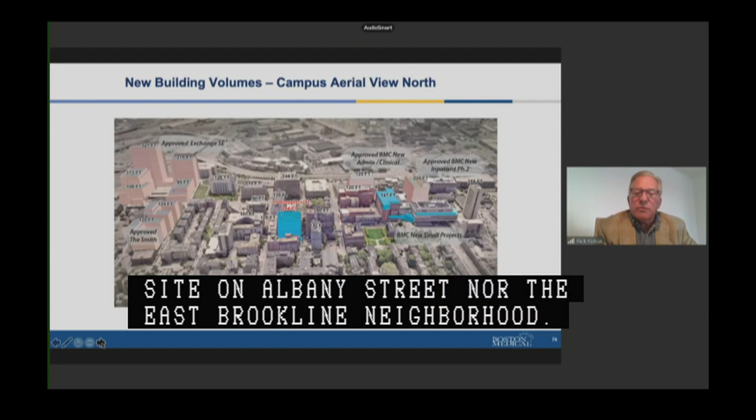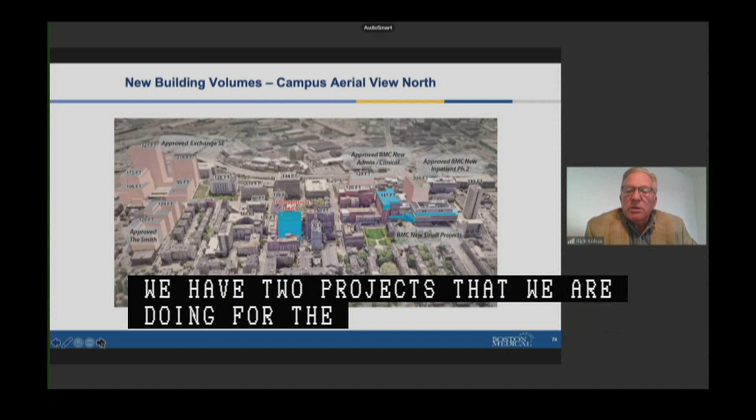Transportation is not greatly impacted by these changes. We've actually reduced the number of ambulance trips on Albany Street by 10,000 each year. We've greatly improved traffic circumstances on Albany Street, eliminating curb cuts, simplifying and moving the emergency drop-off off the main street, and consolidating loading and service to the south side of Albany Street, also moved off of the street.

The proposed IMP 5-year projects actually project fewer annual trips to the campus. The 10-year projects project about 97 additional vehicles in the AM peak and 113 vehicles in the PM peak. As you can see, they're very modest numbers. And this is in part because most BMC employees commute by walk, bike, or other and public transportation. Relatively few actually use private automobiles to come to the campus.

And we will work with our employees to continue to improve the transportation demand management programs, try to maintain or maybe even improve our employee mode share. We will improve the Menino and Moakley pickup drop-off areas as part of the lobby addition so that we eliminate any backups that may occur occasionally on Harrison Street, and no new parking is needed as a result of these projects. Next slide. And here I'm going to turn this over to Megan.

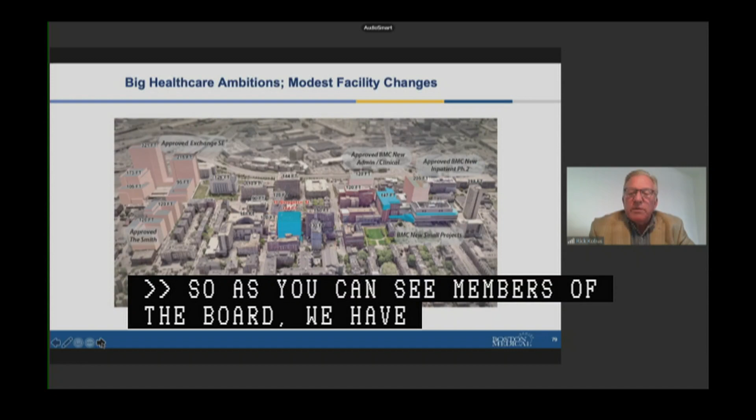So thank you again. Next slide, sorry. Actually, one last comment. So as you can see, members of the board, we have significant healthcare ambitions that continue to serve the populations of Boston in a unique and very friendly way, and modest facility changes that are required over the next 10 years to continue to support the patient. Thank you for your time. We appreciate that. We'd welcome any questions you have. Next slide.

Okay, so does that conclude your presentation? Yes. Perfect. That's it. All right, so before we start the public testimony, do we have any questions or comments from the board before we open it up to the public? Okay, hearing and seeing none, Secretary Polhemus, do we have anyone who would like to testify? If you'd like to testify, please raise your virtual hand, please. Madam Chair, I do not see any hands raised.

Okay, thank you. Do we have any email testimony that needs to be read into the record? I don't believe so, no. Okay, perfect. Opening it up one last time to questions or comments from the board. I had one question. Thank you so much for all the work you do. And I was curious how you would reduce the ambulance visits on Albany Street 10,000 per year. Does that mean you just rerouted them in a different direction, or what was that about?